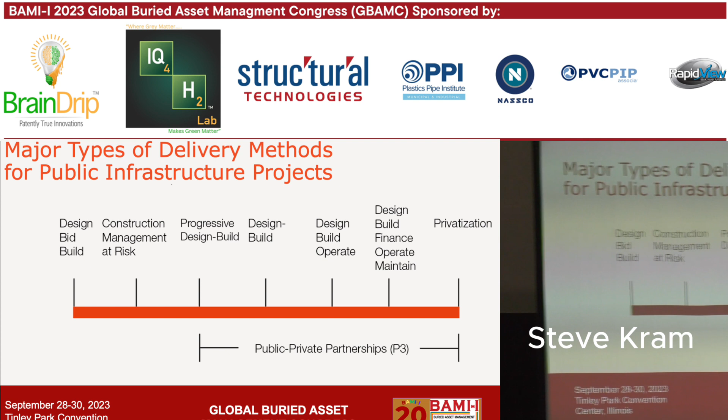Because of this shift, and I'll show you some statistics on what's happened in the industry. So for the first 15 years of my career, that's what I did: design, bid, build. And then I got to do my first alternative delivery job, a design-build job. And I literally thought I had the magic wand.

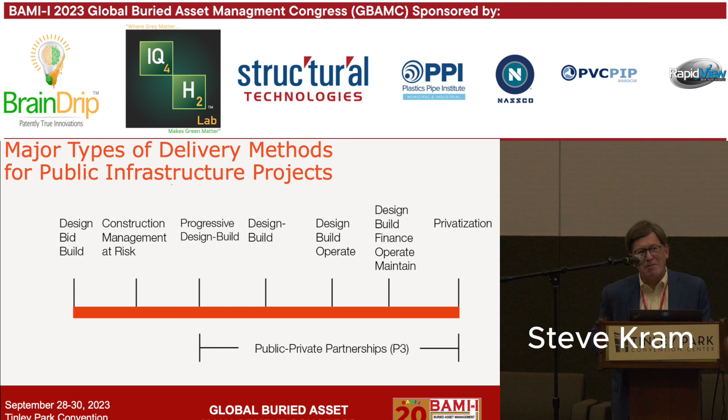Now, my projects would all be successful. I wouldn't have overruns. I wouldn't have claims. We wouldn't have change orders. All that stuff is going to go away. Well, it happened for a little while, and then there came a shift where the finger pointing changed. So what seemed like a good solution, and I'm going to show you some important numbers in a moment, you'll see suddenly alternative delivery doesn't sound so good anymore.

Okay, and we're going to go through these, so if you're not familiar with them, we'll get you to be an expert in every type of alternative delivery by the time we're done. So design, bid, build is more of a linear process where the designers design the job 100%, and then the owner puts it out to bid and selects a contractor, usually on low price.

We have CM at risk, meaning construction management at risk. A constructor is selected based on qualifications shortly after the designer selection. Then what usually happens is there's a pre-construction phase where the design gets to maybe 50, 60, sometimes 100% before that contractor submits a final price, a GMP, a guaranteed maximum price. The advantage of that is they're then bidding on 100% design jobs, so there should be more confidence in their price.

I'm going to skip progressive design-build and come back to it. Design-build lump sum: traditionally, an owner's engineer develops a preliminary design, maybe at 30%. They put it out to bid. The design-build team bids on the work. Maybe there's a tender period where they get to develop that design further. Maybe the owner pays for some of that tender design with a success fee, and then they bid that job.

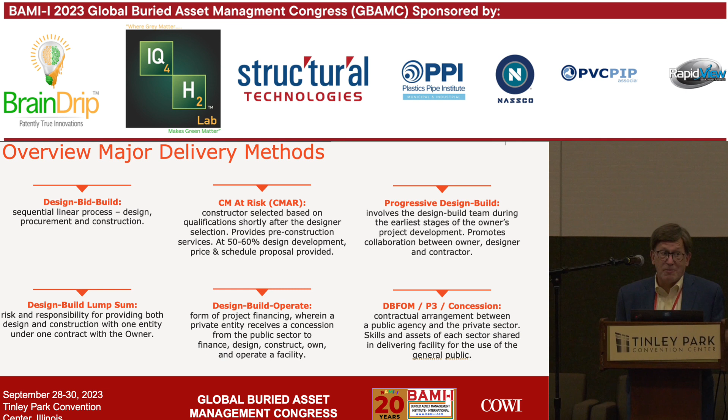Now, progressive design-build came about recently. Everybody thinks it's the great way to do things right now. Here, you're going to choose a design-build team based upon qualifications. And then they're going to develop the design together, and then the owner allows them to submit their price, and the owner can decide whether they accept that price or put it out to rebid.

So I won't say the name of the job, but I was not the winning team on this one. And the owner estimated the job was going to be about $3 billion. Okay? Big job. They selected the progressive design-build team. Want to guess the price, if you know the job? 5? Do I hear higher? 10? $15 billion.

Okay? Now, is that the right price? I don't know. I do know what my team estimated it at. It wasn't $15 billion. So, was this an optimal way to do it? I'm not sure. And then there are versions of design, build, operate, and I'm going to show you that, where there's a concession or public-private partnerships that have been used a little bit in the U.S. and more in other parts of the world.

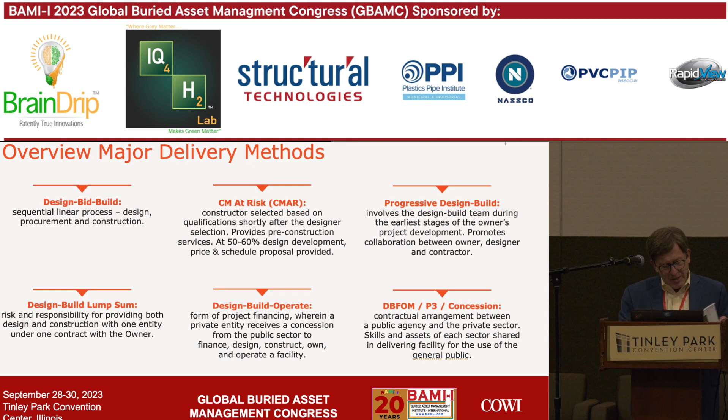So this is fun to look at. This would be what the Design Build Institute of America would say: by using alternative delivery, we save time, and therefore we save money. Sometimes 10%, 30% of the time to do the job. Well, how does that happen? Typically, by not having to do 100% design before starting, you can start early on specific items that need to get built. So you're running design and construction in parallel, and that saves time. Does it always happen? No. Sometimes, yes.

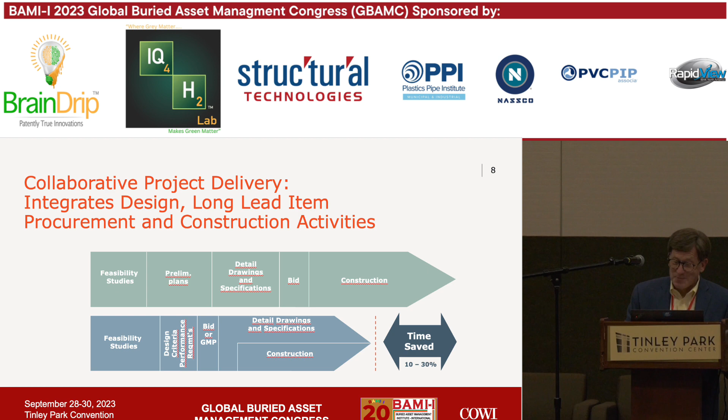So here's the interesting part of the story. If you remember one thing from today, remember this. Travelers Insurance, one of the largest bonding companies in the U.S., looked back in a 16-year study of work they had insured: 224 projects with construction costs from $250 million to $4 billion. On more than 4 out of 10 projects, the design-build contractor did not cover their cost. That meant they lost money.

Okay? In particular, big design-build projects were money losers. And according to this study, contractors did better with conventional delivery. Now, this isn't just underground work. This is all types of work. But I could rattle off underground work where this was true.

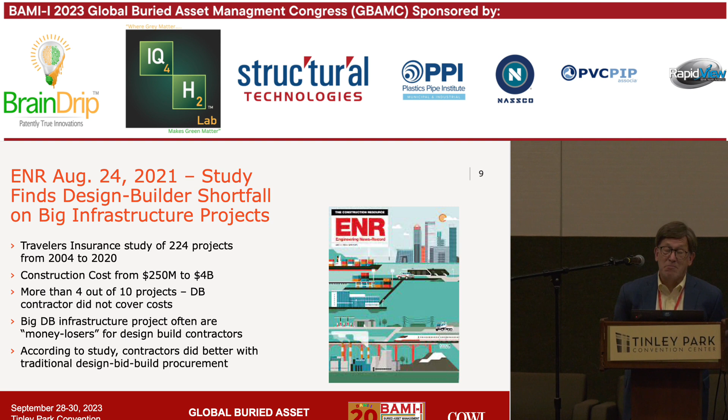So this caused a pretty big shift in how people wanted to look at things. And the contracting community said, uh-oh. But more importantly, Travelers said, we may not bond you if you take on these certain types of jobs because we think the risks are too high.

A little scary, right? With all the money that's coming out, I say it is a fantastic time to be an underground or tunnel engineer. I could hire probably 25 more engineers and put them to work today if I could find them. And this goes for a lot of our profession right now. Because of all the money pouring into infrastructure, we don't have enough people.

So just to give you a little taste of some of the projects that have occurred out there. These were done with conventional delivery. And these are some mid-sized projects and some very big ones. In particular, conventional delivery is still popular at some of the major water and wastewater authorities, as you see here with Northeast Ohio, Indianapolis with a deep rock sewer, and then you see, for a while, New York did not want to do alternative delivery.

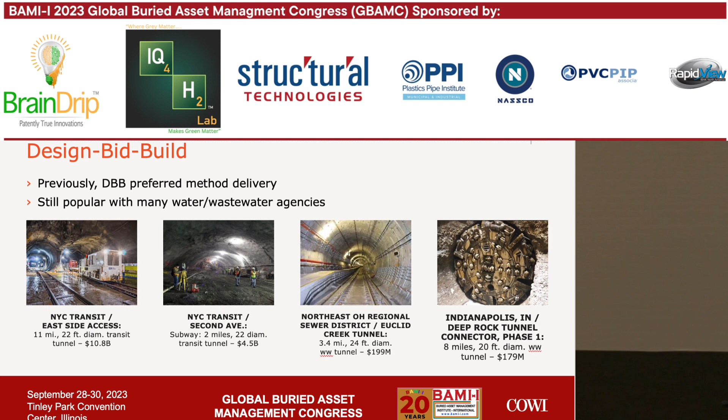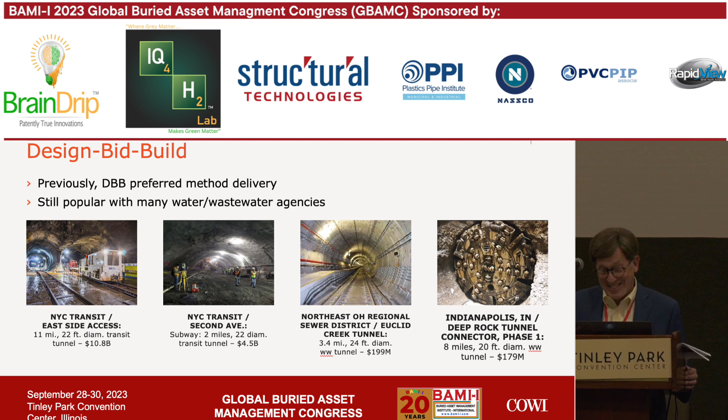But the cost of that project is astronomical. To do 2 miles of tunneling was $4.5 billion. $2.25 billion per mile. Expensive, right?

So why do owners continue to use design-bid-build? They like to influence the design. They like to understand their cost before going to bid. They want to transfer risk. Contractually, they just understand it better. Sometimes they want to specify technology. So this is a way to do that.

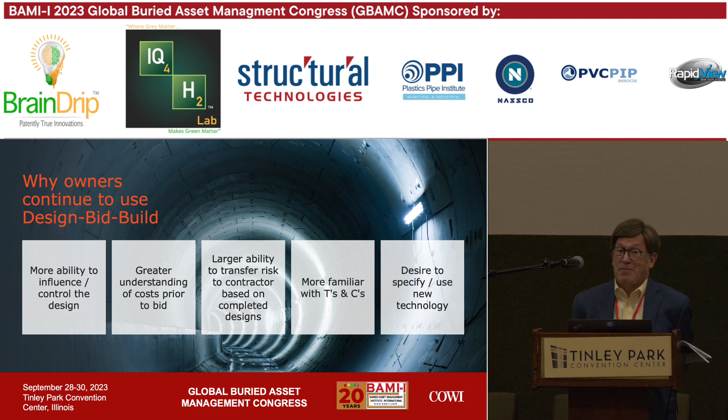So the flip side of the coin, why do we go alternative delivery? And those are all the other methods that I showed. Single entity responsible for design, construction, technology, and project delivery. So I only have one. If I'm an owner, I only have one person to yell at. I can't yell at the designer separately from the contractor. I just yell at the contractor. Why are you late?

If we do it right, it should cost less money, should be more efficient to administer, and maybe we get rid of some of that adversarial nature between the players when it goes well. So this is a nice quote from a senior manager at a big authority. They have stopped basically doing conventional delivery. They now use design-build for all their projects. That's what they do. It's a big change.

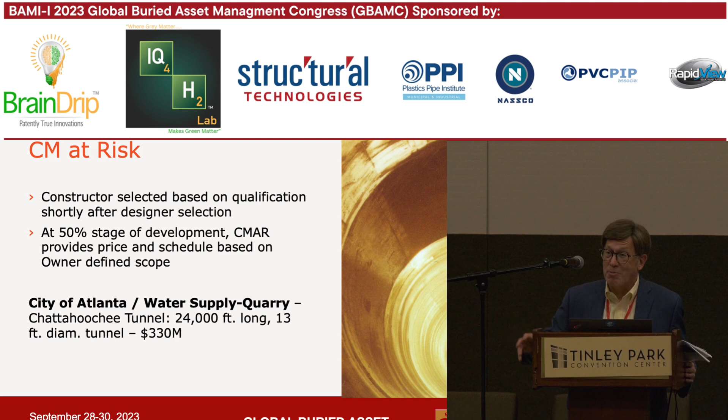And this went out as a CMAR where they had a designer on the owner's side, developed the design in parallel with a contractor that was selected. Then they converted it to a GMP, and this project got successfully constructed. What was nice is this is a reuse project because eventually they covered that quarry and created a beautiful park above that landmass.

I'm going to stay in Atlanta because this was a recent progressive design build. Who has flown to Atlanta? A lot of people. Popular airport. So you ride what's called the plane train. And the plane train takes you between terminals and to baggage claim. But there was an issue. There was some congestion happening at that endpoint. So they needed to expand that tunnel to deal with those trains.

And what you see in this orange line there, it had to go beneath what is the Sky Train that goes to some hotels and to the rental car agency, and they had to go beneath the MARTA system, the subway system. So short tunnel, very complex. Good reason to use progressive design build. People really weren't sure how to do this. Highly complex job, even though it was a short tunnel. And as I show here, it was only a 700-foot extension.

So they selected a progressive design build team that worked with the owner to come up with a plan, and they converted it to a GMP. That got selected to do it. This was also a highly secured area that made this more complex.

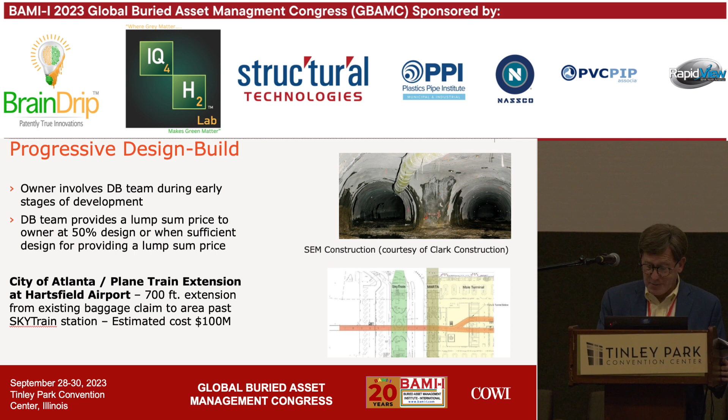Now we'll get bigger, and I don't think George is still here. I'm going to do a little case history on DC Water because they've done so much tunneling. And so we'll get into that in a moment. But these were design-build lump sums. And the Parallel Thimble Shoal Tunnel is in the Virginia Beach area. And this was called the seventh wonder of the world. One of my former firms, Sverdrup, was originally the designer of this. Those that remember that name, it eventually got bought by Jacobs.

This has an immersed tube tunnel, then a bridge, and then another immersed tube tunnel to go across the Chesapeake Bay. They needed to build some redundancy in the entranceway on the Virginia Beach side. So they wanted to do what was called a parallel tunnel. And they had some great expectations of what they wanted to do. So I got to bid this job twice and came in second twice. So it was painful twice to do.

But this set a parallel tunnel, and they let the contractors select whether they want to do immersed tube tunneling, which is a sunken tube, or a bored tunnel. Eventually, everybody selected to do a bored tunnel. What was interesting, though, is the immersed tube tunnel was a cheaper way to do it, but the environmental approvals were so onerous, we never thought we could get it approved quickly. So it was interesting.

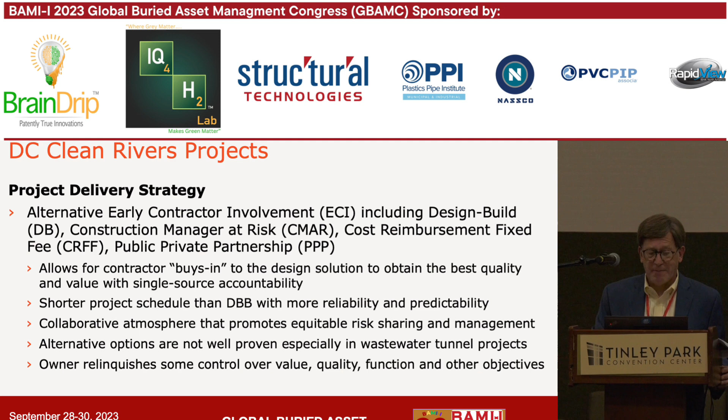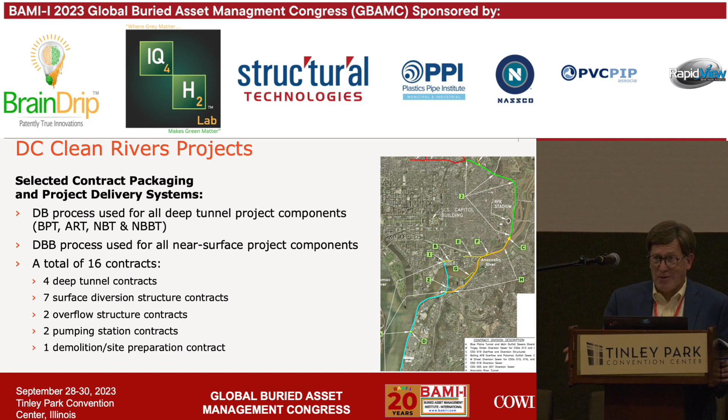So you can see what happened here. 5 big tunnels, 3 are complete, one is almost done, and one's about to be awarded. All being done with design build, with quite an array of contractors across the country to do this work. It's a fairly prescriptive design build that's being used.

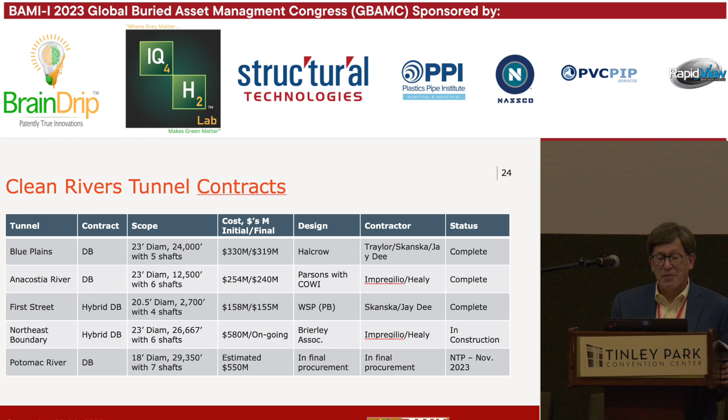So P3s, it's a contractual arrangement between the agency and the private sector, usually for a shared facility, but I'll give an example where in FDOT, Florida Department of Transportation, they used an availability payment system to get done what they wanted. Often, this involves financing, ownership, and operation of that facility, frequently used in toll roads.

The first one was the Dulles Greenway outside of Washington, D.C., done now over 25 years ago. Indiana Toll Road was another, not too far from here, and there's been a mixed bag of success with P3s. For a while, the Canadians loved P3s. Now they've kind of soured on them.

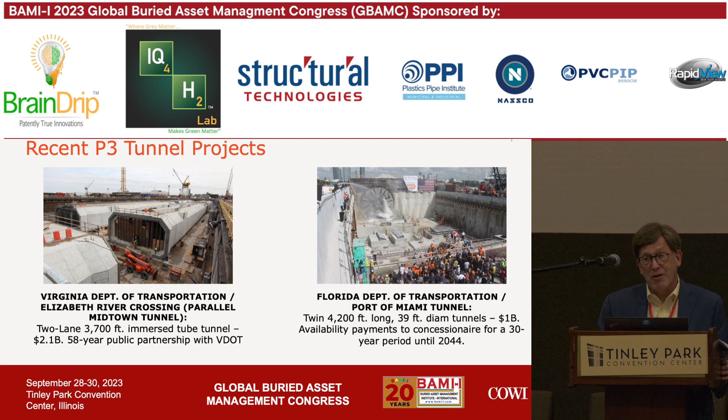So some recent P3s, one example was the Midtown Tunnel in Virginia again. This was done by a team of Skanska, Kiewit, and Weeks. They are now operating this tunnel. It was a 58-year public-private partnership, about $2 billion, and this was the last immersed tube tunnel that was constructed in the U.S. There is an immersed tube tunnel being considered right now for the Fraser River in Vancouver, BC.

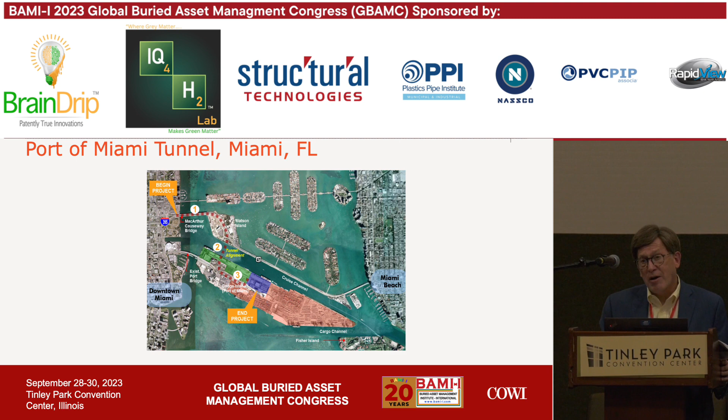Another example, I'm going to go through this in a little bit more detail to give you a flavor for it. This was the Port of Miami tunnel that I had the pleasure of being part of. This was a very complex geology that was difficult to go through. So for years, cars and trucks came to Miami and had to go through downtown Miami to get to the port, causing congestion and chaos in the heart of Miami.

So people were talking about, well, can't we put a tunnel in to connect Miami to the Port of Miami? You come down Interstate 95, it kind of just ended in Miami, but didn't get you to the port. So this is all the truck traffic going in both directions, all the people that want to take cruises, and just horrible congestion in Miami.

A lot of people thought the geology here was inappropriate for tunneling. So a lot of evaluation was done. This went on for a long time. And they did what was called an availability payment here. FDOT did not have the money to pay for this tunnel. So what they said is, you bid the job and we'll pay you out over many years. So instead of having a concession, this is called an availability payment. And Bouygues, who's now called CBNA in the U.S., was the winning contractor with Jacobs as their designer.

In the midst of this getting awarded, what happened in 2008? Who remembers? The financial markets collapsed. There was no way to get this project funded. Fortunately, some people came together, Meridiam came in, and others came in and figured out how to get this done. So this went to close. Long construction period, but now this is fully operating.

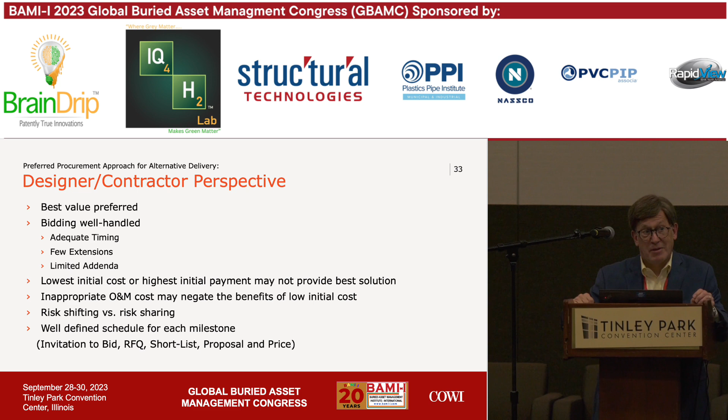What's interesting, I'm part of a job right now, a design bid build job, that's using a best value approach, which is highly unusual. They're going to use 60% price and 40% qualifications to determine who they want. It's a very complex job. It's not too common that you see that. Remembering that lowest initial cost doesn't always provide the best solution. Risk sharing versus risk shifting. If you just shift your risk, you pay for it.

So just put this up that doing alternative delivery is a lot of work. It's almost like you're doing another job very often on these long tender periods. So it's very painful when you lose these jobs. The need to innovate is highly important when doing this type of work.

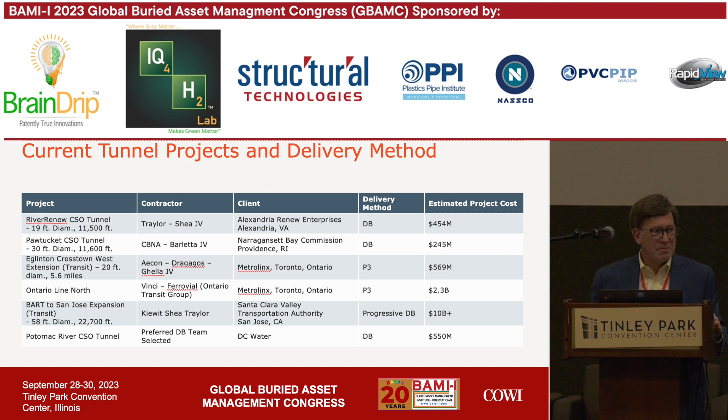So just close with a few slides here, just showing you what's happened recently. For these major underground projects, all of them went alternative delivery. Every one of them. And then I put up this list. So this is what's coming. Most of these are going alternative delivery. And you can see these are big jobs.

What's interesting is the Gateway program, that if you live in the Northeast, is a very prominent program. It's been around a long time. President Biden's been out there saying we're going to break ground. There's 4 major contracts on Gateway. 2 are going conventional delivery and 2 are going alternative delivery. Interesting.

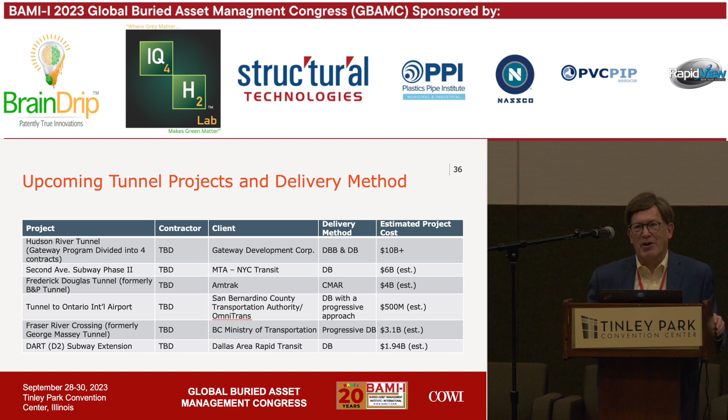So to wrap up, owners are using everything, depending upon the job. I don't think there's one solution out there. There's clearly a shift, but conventional delivery is still used. And designers and contractors are adapting their approaches to do this.

And if we had more time, maybe afterwards, I put up these questions to think about. Do you agree with the trends that are happening? Do you think it's right? Those of you that have used all these methods, do you like them? Do you have a preferred delivery method? And what do you see as the major issues facing us today?

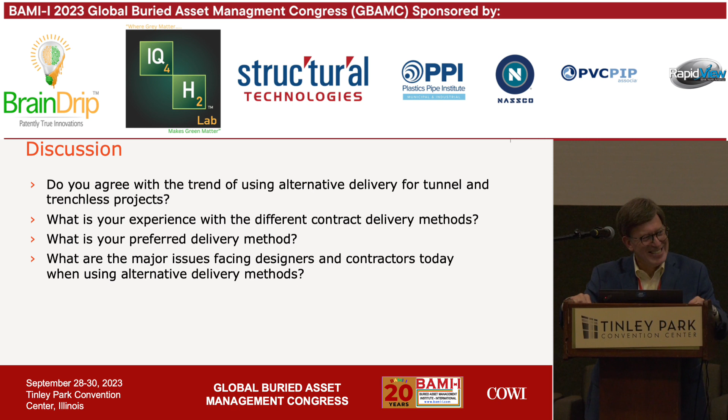Excellent presentation. Good way to end the day talking about delivery methods. Okay, anybody have any questions or comments? The questions that we have up here might be good for our brain think tank tomorrow.

Yeah, Tom? Only if you buy me a drink, Tom.

Yeah, you put out the question, does anybody have any preference on different methods? What are your thoughts? I would comment that each is probably appropriate in different situations, and it must be linked to the risk allocation and the risk sharing, and in some situations, depending on the risk of the project, one delivery form may be more appropriate, and in another situation, another one. I mean, would you agree? How do you think that breaks down?

So Tom asked if I have a preference. I do. When it's executed fairly, I would stay with what I'll call traditional design build. And the reason for that is what I've seen with progressive design build, the expectations are not aligning with reality.

What's happening is the owner sometimes thinks that this is going to become a better process, and somehow this is the solution to all their problems. The solution to the problems is to execute design build properly, in my view, where you fairly share the risks and identify how you want to execute it. Okay? Doing things like risk ladders, having good ATC periods, having fair stipends. Those are all elements of doing it right.